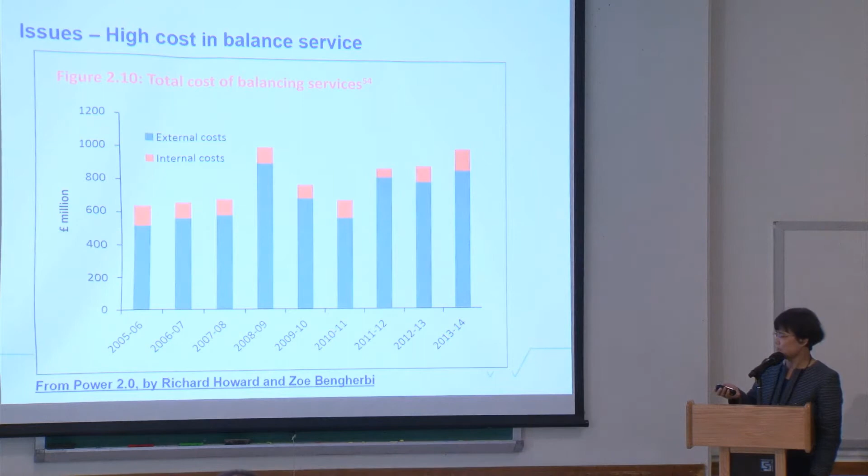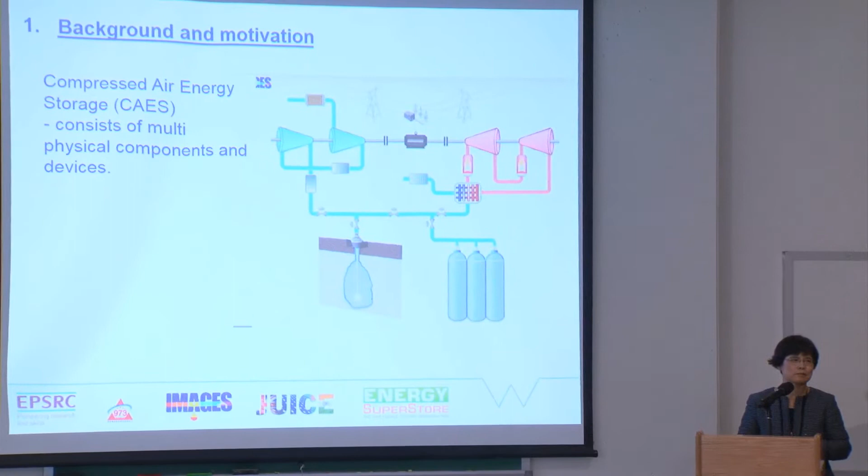So apart from the technology and environmental driving force, another is about the business. If any technology can reduce the cost of balancing, it will benefit the grid, benefit electricity transmission and distribution. So our work is focused on compressed air energy storage. Why compressed air energy storage? Mainly because of our background; we are not chemists, and certainly will not go to batteries.

Also personally, I always feel using batteries for large scale energy storage, like a few hundred megawatts, is kind of sorry, because such a delicate technology we can put into mobile phones and laptops and for mobility, but we put billions of cells packed together, standing there for 10 years, over 100 megawatts for this kind of application. And in the end we have to recycle or process the waste afterwards. So personally, I quite prefer something that naturally can be large scale and naturally has minimal environmental impact.

So that's why we focus on compressed air energy storage and thermal storage, not just the technology itself but also the integration with the grid. For this piece of work, another motivation is I attended many conferences, and the very interesting thing is almost all people presenting their work spend the first 10 minutes on modeling, then come to the case study or simulation work and the results and analysis. So there is a lot of modeling work repeating each other, because it's generic.

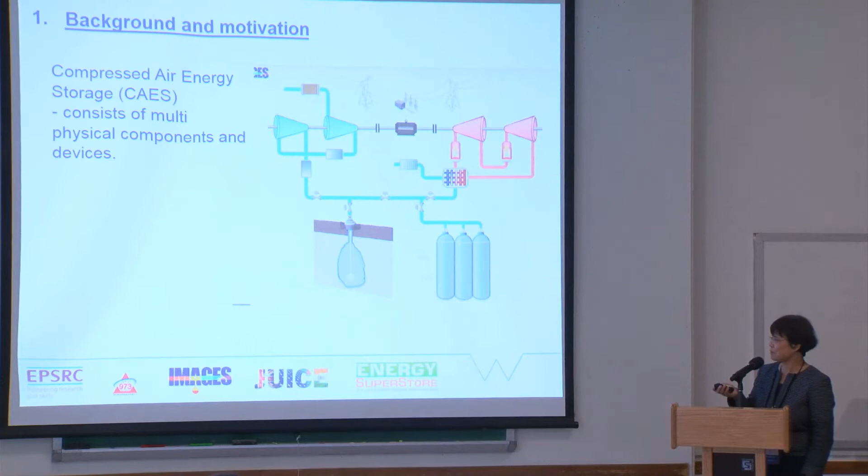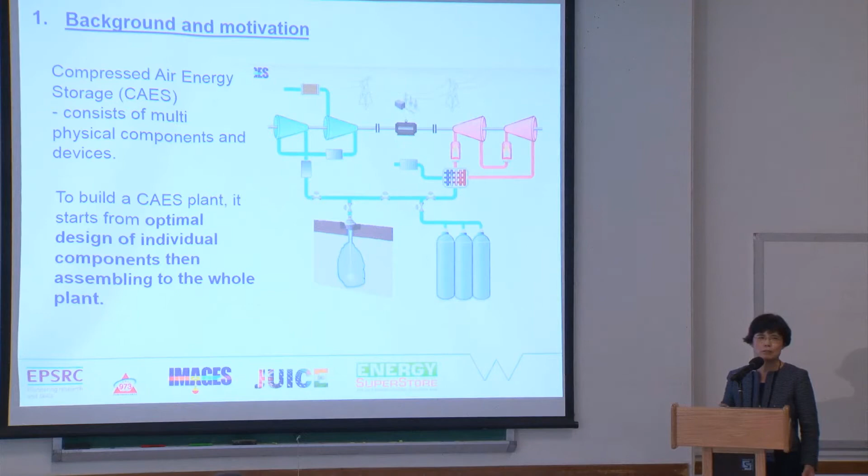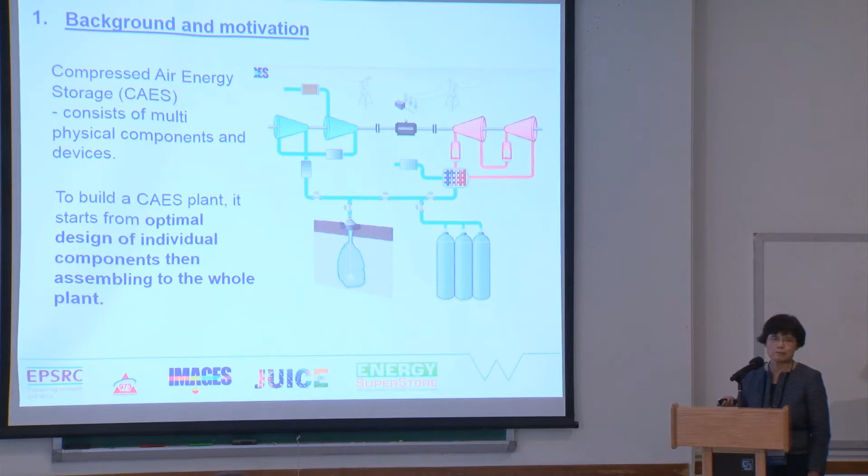So for this kind of system, if you put a real system in place, even if every single component is optimized and designed, in the end your whole system may not be optimized and sometimes cannot run. If you're lucky, you put something there and it simply works. Sometimes you spend a lot of money trying to make corrections and in the end it works. Sometimes no matter how much you try, it still doesn't work, mainly because dynamically they may not work together. So this is why from the beginning we focused on dynamic modeling rather than just steady state modeling.

And so to model this as... face this way. All right, okay.

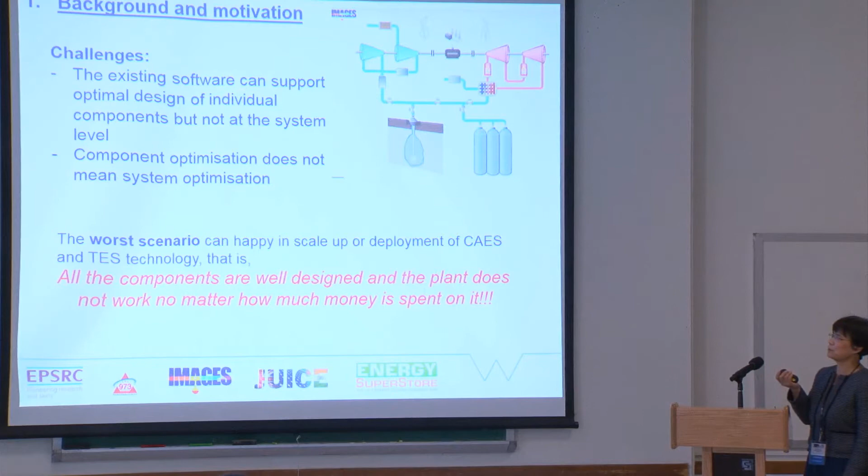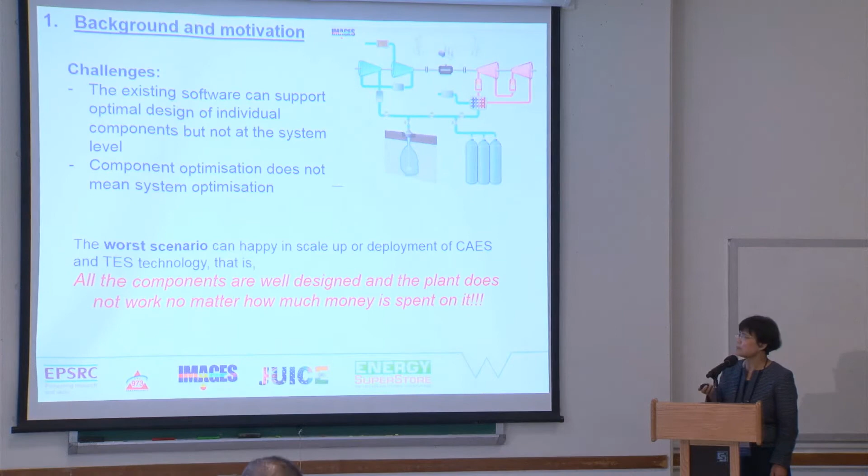So with this complicated model, we started to search if there's any software tool or software platform we could use directly. We couldn't find anything we could simply use. And also there's no optimization tool that can be used directly with such a system. So this is why we started working on this system. Okay.

So the objective is to do the whole system for compressed air energy storage with thermal storage, because for any compressed air energy storage, you cannot avoid thermal storage due to compression and thermal losses. The objective for this piece of work is to model the whole system, make a multi-physics, multi-scale system work together, and develop software that can be used by industry or other research sectors. We hope this can be open source and shared with everyone.

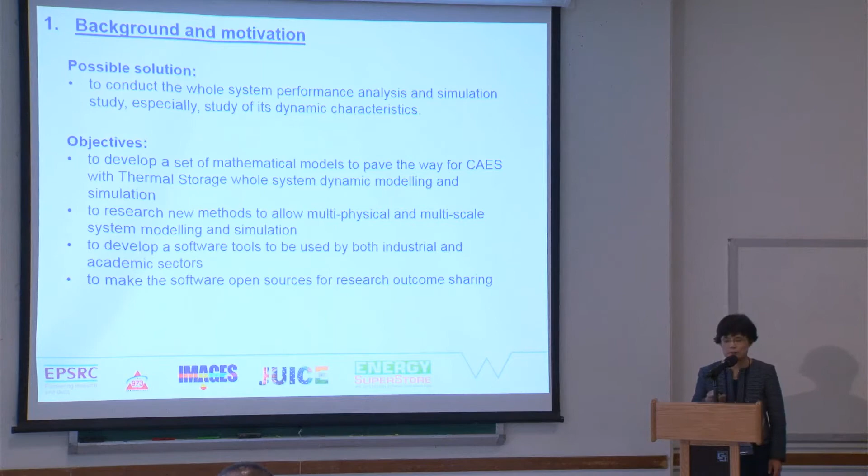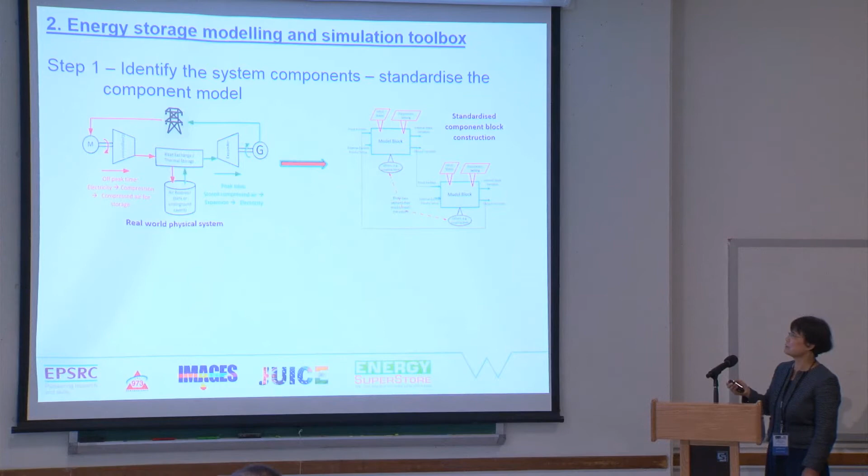So the methodology we used from the very beginning: with this system, we picked up components and tried to make them standard. We set up standardized blocks, with standard input and output, parameter settings, and interlinks between blocks. So no matter what kind of blocks you develop, they can be interlinked together. Underneath every single block is physical mathematical modeling.

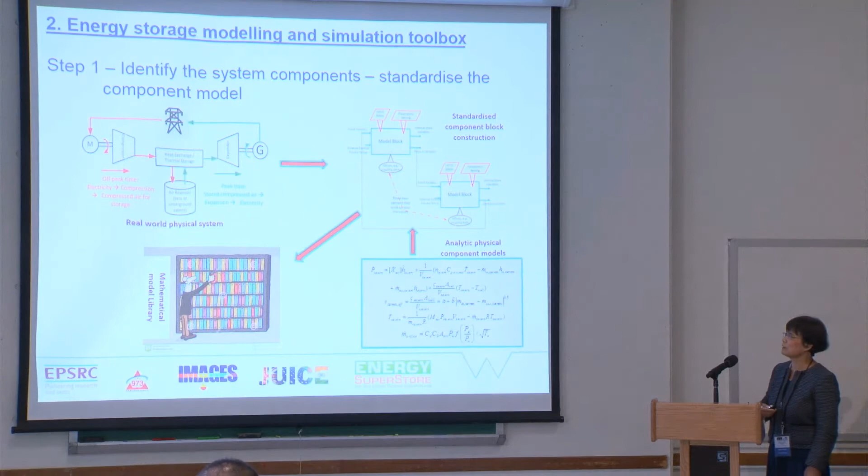After the model is developed, we put it into the library, so anyone can use it, and you can pick them up and link them together. So we hope this modeling can end up being used for dynamic simulations and also for process optimization.

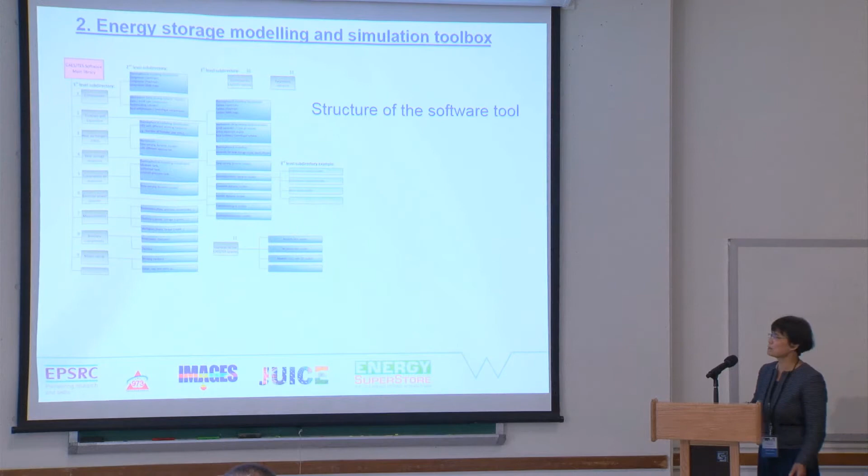So in the end we use MATLAB Simulink. We developed this library with all the modules, and we have a library and categories. So when you come to the toolbox, you can see these different libraries: compressor, expander, thermal storage, heat exchanger, and everything, and electrical components.

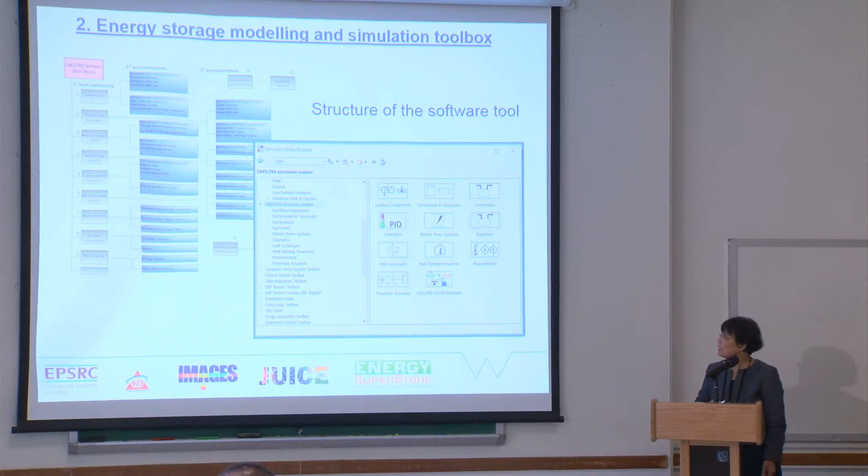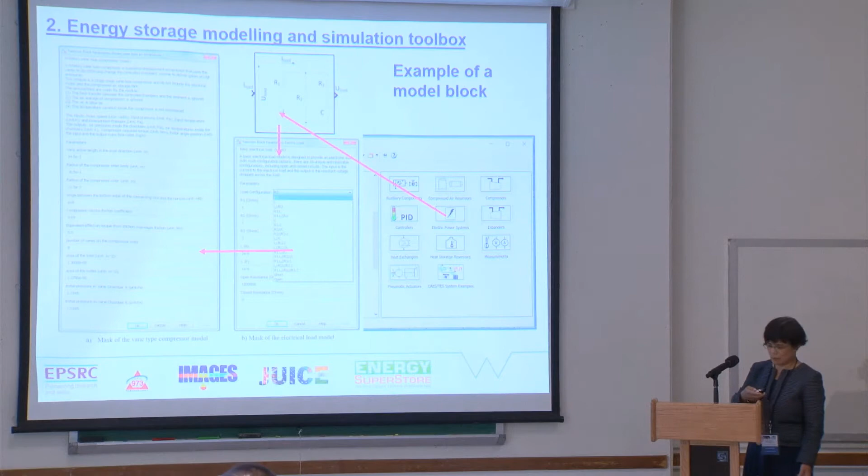So when you open one particular library, you can find different components. For example, if you find the electrical load, you can click on it and pick up the load type and the set of parameters from this electrical power system, and select it. Then you select different components and put them together to become a process.

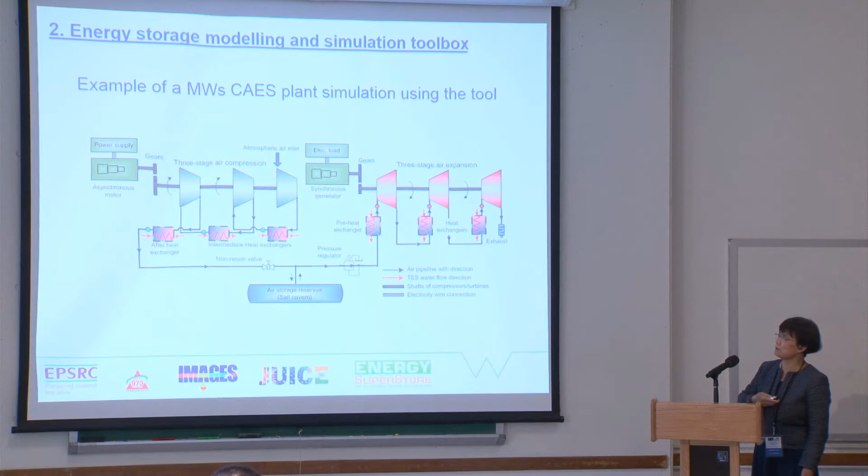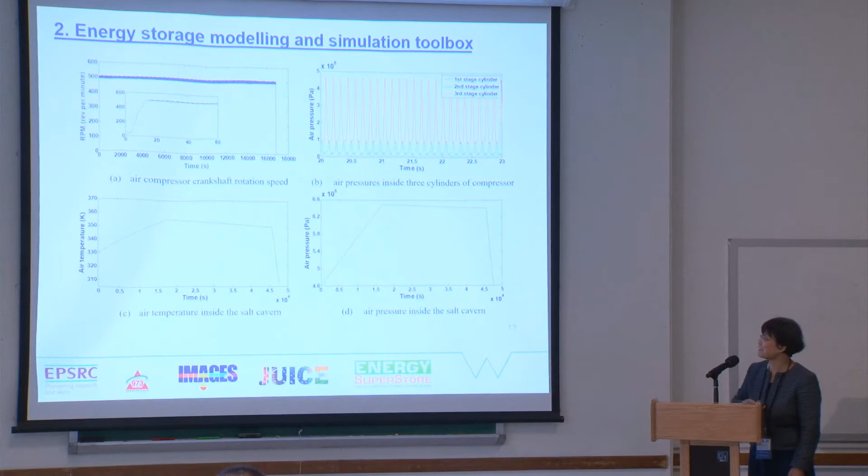That's also for electrical power, the rotating speed, and everything. With this development progress, certainly we had difficulties. Some components we can use experimental data and data sheets to verify the model, and for some we cannot find any data to verify. So with all this library model, we tried our best to verify either by experimental practical operation data or published data in the literature. And putting it all together, we formulated the whole library.

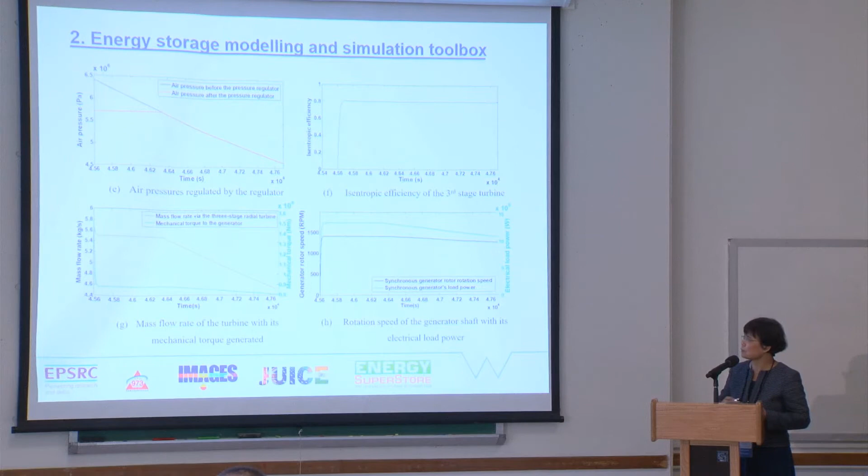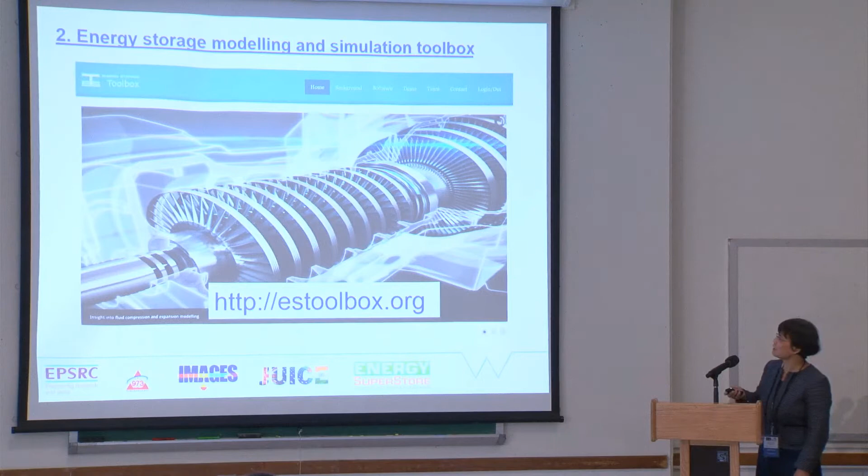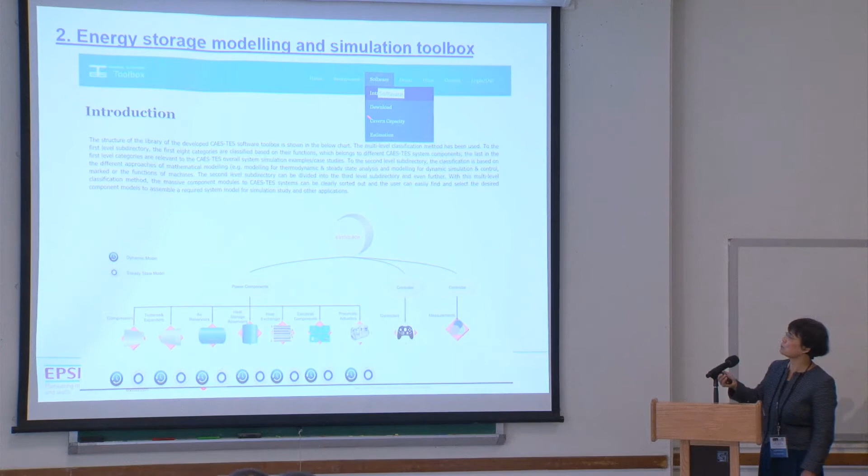And then we put it onto a website, and that's the website address, estoolbox.org. If you are interested, you can log on to see what it is. On this website, if you go to the software, you have this library, and then you can go to download, but you have to register before you download, because we like to share the information with everybody. And also we'd like to hear your feedback if you find anything not quite right.

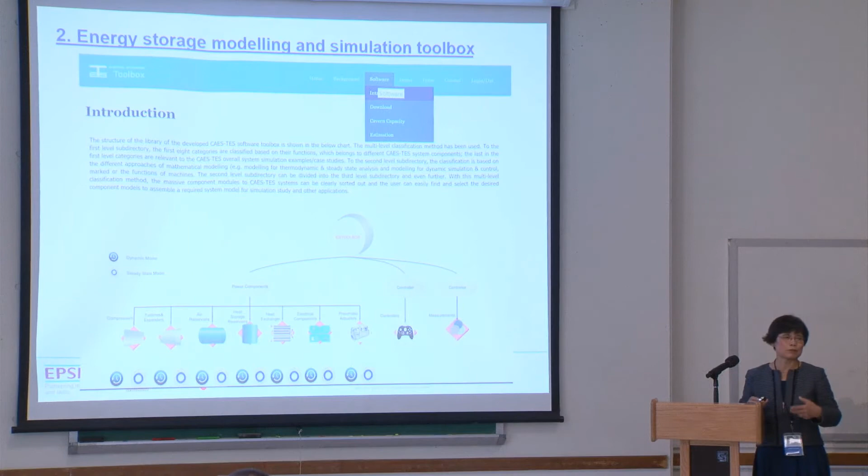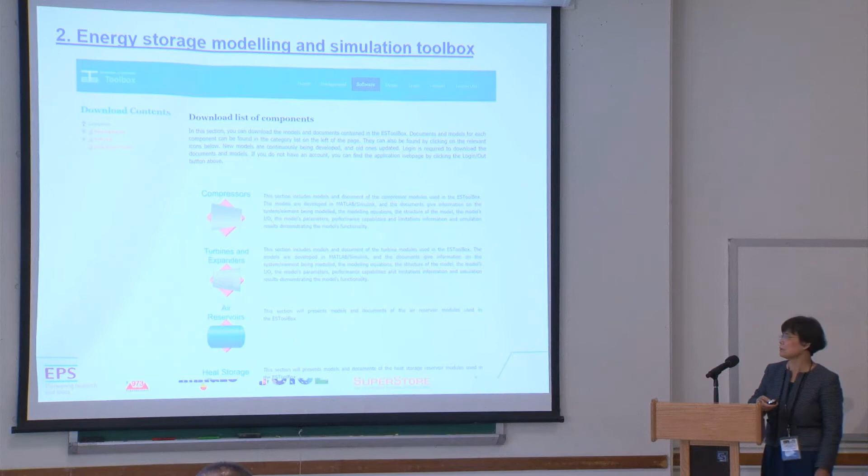When you come to the download, you have different categories. Which category do you want to download? You can download the whole library, or you can simply go to different components if you're interested. And for how to use it, we have a demo video showing how to use it, how to set up parameters, how to link them together. You can watch this. So it looks like the story is completed, but actually it's not.

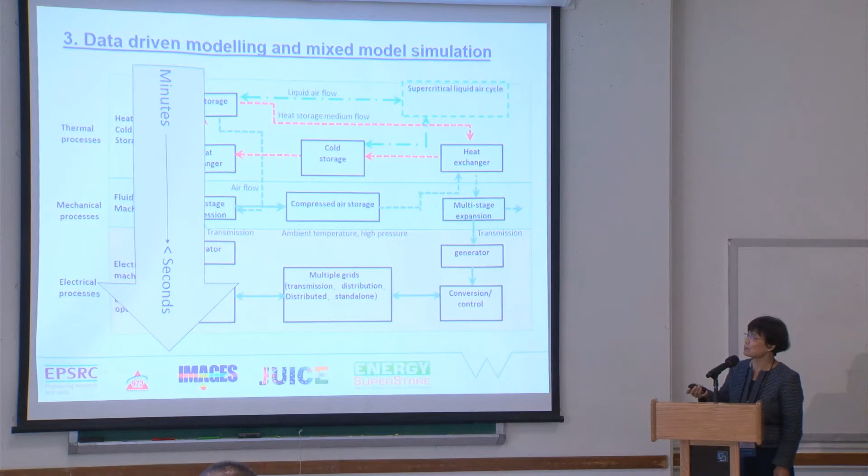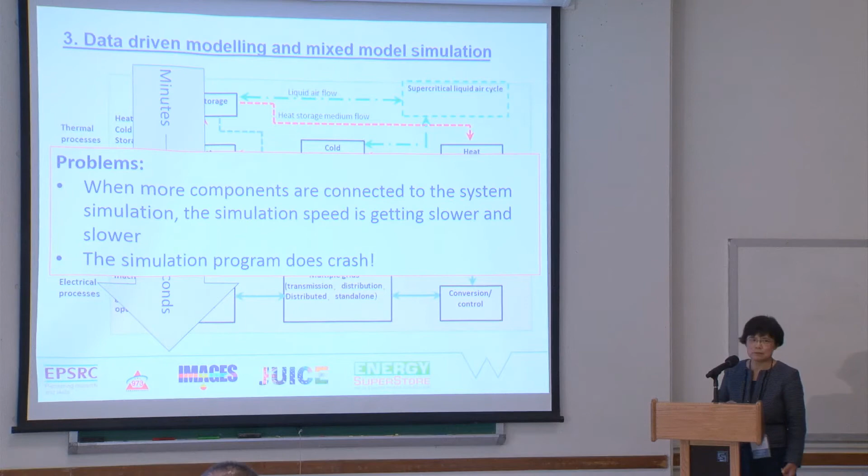When we put all these components together, sometimes the simulation crashed. Why? Because in the system you can see thermal, mechanical, and electrical, all different processes with different time scales. So when we do large-scale system simulation, sometimes it becomes very, very slow, sensitive to parameter settings, and sometimes crashes. So from that, we started thinking whether we can improve it.

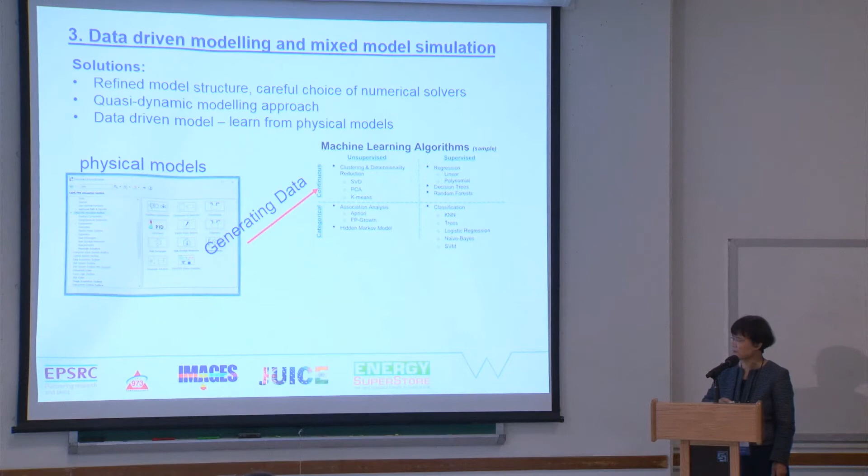So the solution we're trying is to use a mixed data-driven and physical model together. That means, with this library, suppose we trust our model; we use the model to generate data, and then use machine learning to train a black box model, for example a neural network, to replace the physical model. If you put it in a big system and you are not really interested in tank storage, you can replace the tank with a black box model, but concentrate on the compressor dynamic study. That makes your simulation faster.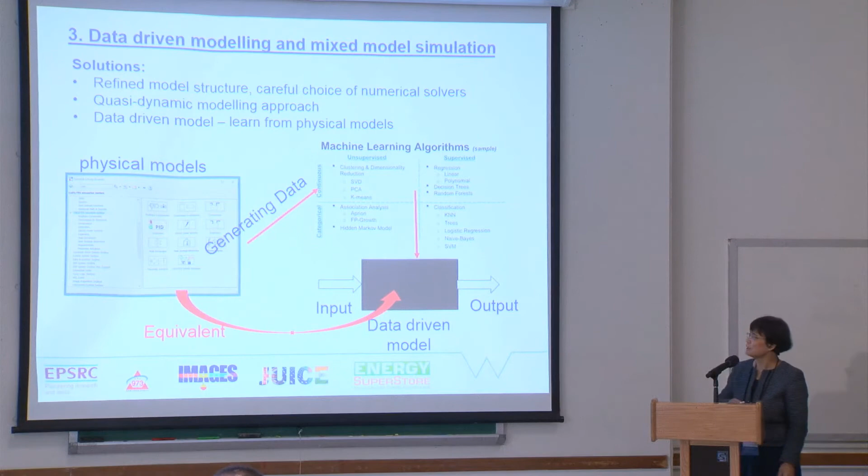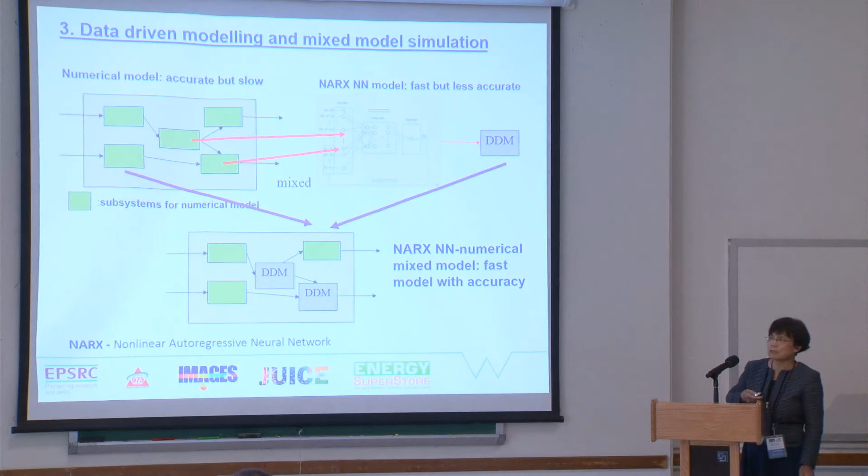For example, if we have 5 modules, we can pick 2 to become data-driven models, insert these 2 back, and in the end you have a mixed model simulation. There's a kind of flow chart for this process. For example, we did a test with a piston compressor charging process, and in this process we have electrical, mechanical, and thermal all together.

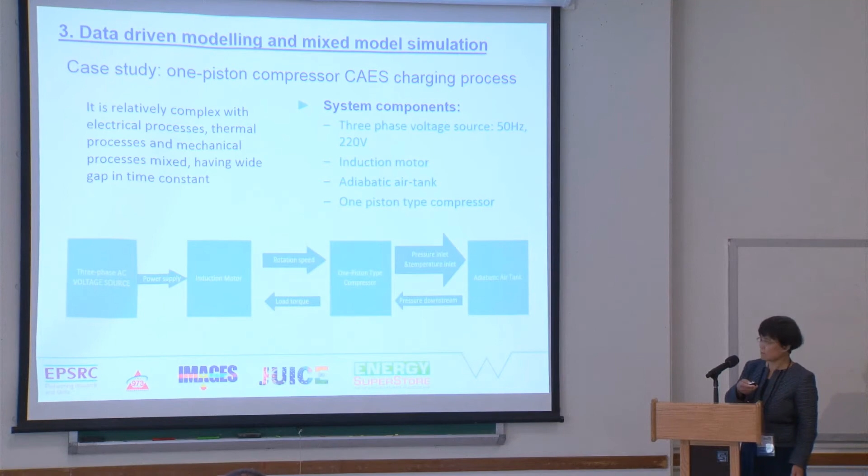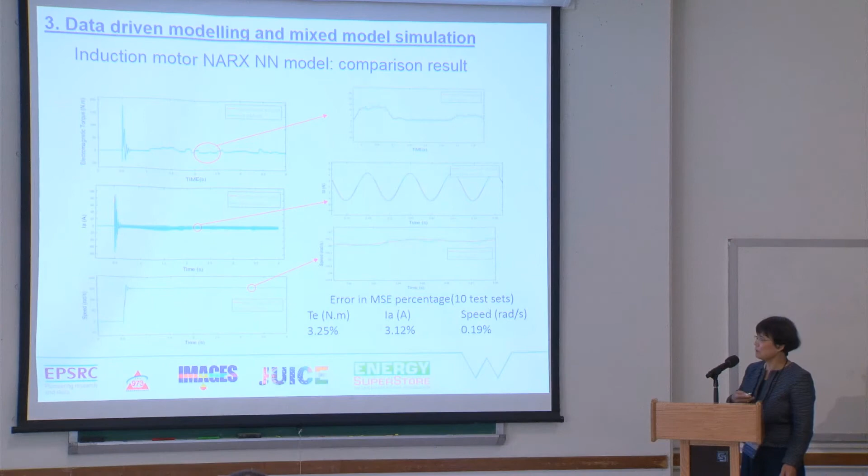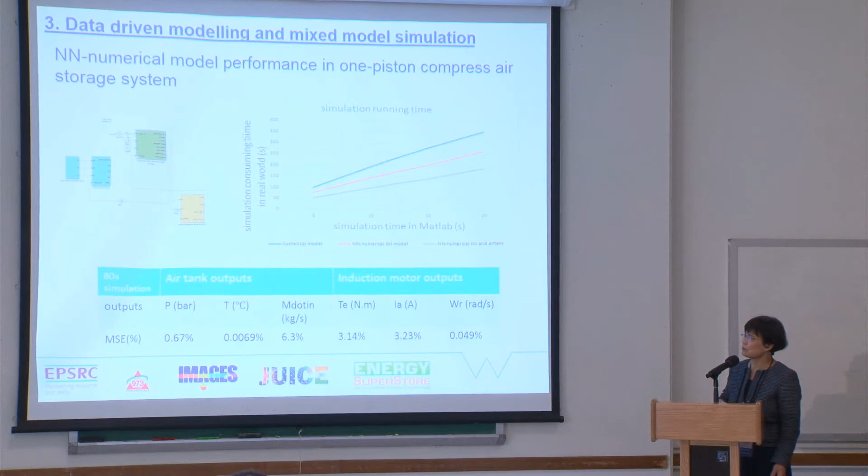So we picked one mechanical part, the electrical machine part, and did this neural network modeling. We put this model back and simulated. From the simulation, we compared the pure physical model and the mixed model for accuracy, if we believe the physical model simulation is correct. And the most important thing is the simulation speed. It becomes much, much faster, you save your time, and there's less chance of the whole program crashing.

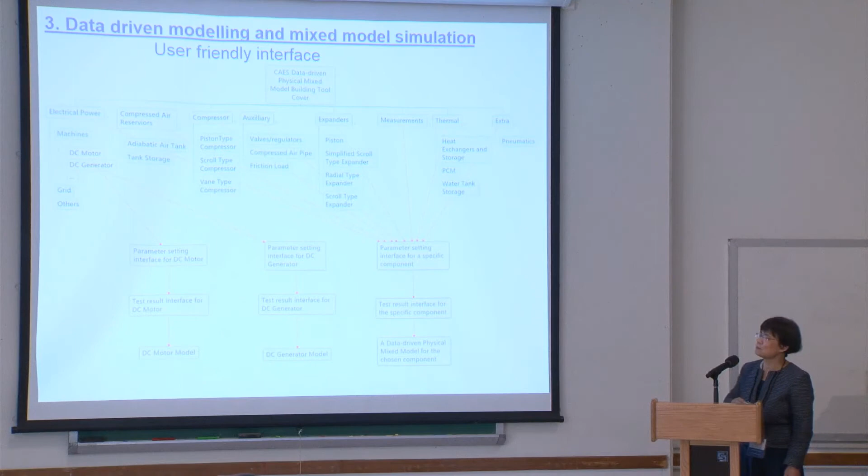Generating a data-driven model is also a complicated process, so we developed another user interface. You go to the interface to pick the components you want to model, then the model interface to set up the physical model parameters, and then go to next. Behind this, it automatically codes the data-driven model to train. After training, it shows the accuracy. If you're happy, you carry on. If you're not happy, go back and train again.

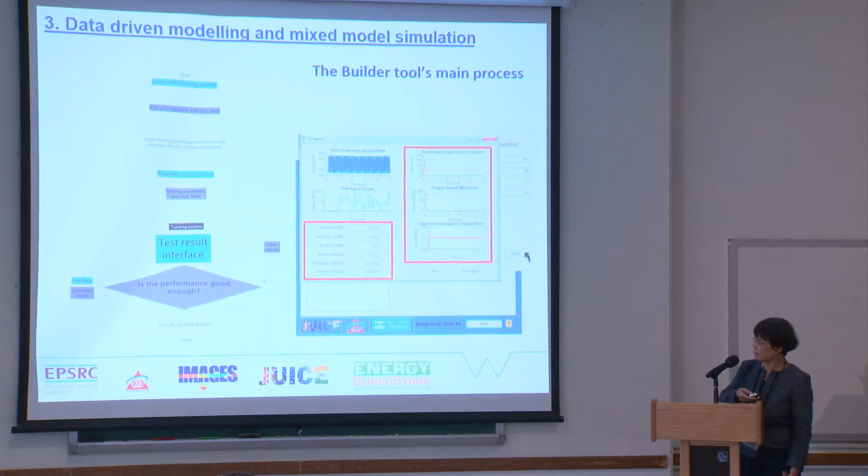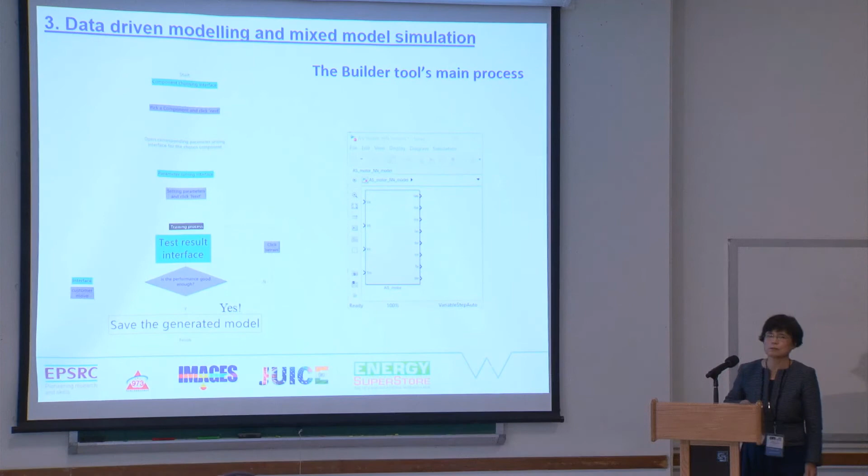Then it generates this data-driven model as a standard module for you. And then you can bring this into your simulation host system. So in the end, you have a complete tool for this.

And so I gave this presentation. I really wish to share this and to get feedback from everyone, and also to bring more people into it, to see if we can get a kind of platform to share our research, and if there's no IP or commercial value, we can save our research time. So that's it.

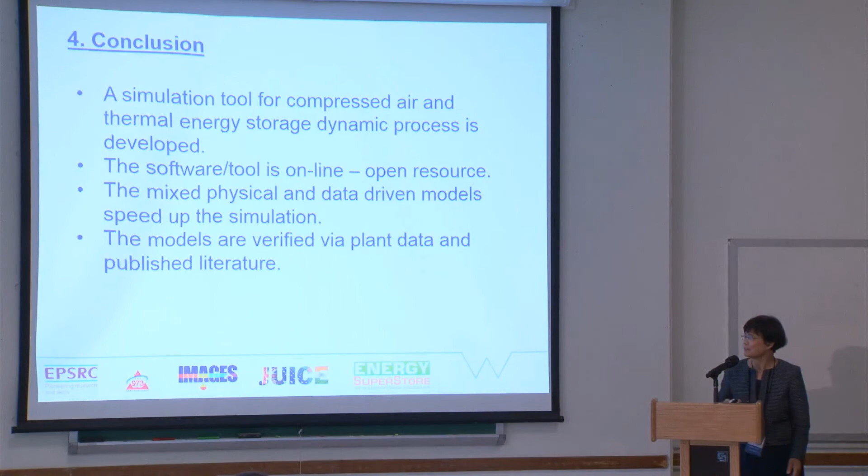Any questions for Professor Wright? Yes. Eric Weld, Duke University. First of all, thank you very much for a great talk and a very exciting simulation platform; I appreciate you sharing it with the world. So I have two questions. One is, I think the last bullet in your conclusions was that you had verified this with plant data, and I was just curious about the level of accuracy of these models for round-trip efficiency compared to experiments.

And then my second question was, with respect to compression, are you considering both isothermal as well as adiabatic compression? Right now it looks like it's primarily adiabatic. Is isothermal something that could be integrated?

Okay. So first about verification and model fidelity, that's a very challenging question, because if you don't have data, then you don't have data. For smaller scale, it's easy. We have our own test system. We have some collaboration labs with small scale, for example a few hundred kilowatts. And we have a collaboration with the Chinese Academy of Sciences. They built a 1.5 megawatt demonstration project and also 10 megawatts at the moment. So we have some data.